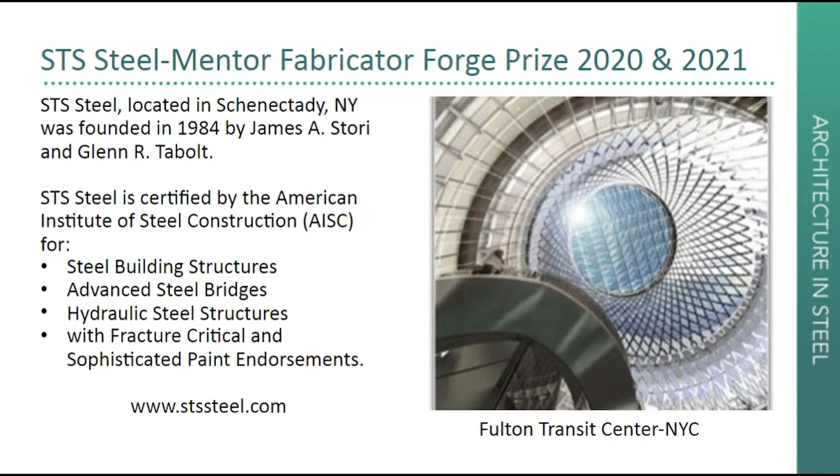When Alex Morales of AISC asked if I would be interested in mentoring for this prize, I didn't hesitate to say yes. The projects we've enjoyed most over the years have involved working with an architect and engineer in the design development phase to develop solutions to challenges created by the architect's innovative use of steel in a unique structure. I love the creative process, which I believe is fostered by collaboration, and I think the Forge Prize is a great way to foster both collaboration and creativity.

I don't want to take too much time away from Matt, Rosanna, and Hunter, so I've only a few slides showing some of the projects which we were involved with the design and which influenced our collaboration on the Forge Prize. In both Forge Prize presentations, you will see built-up shapes that presented fabrication challenges. With Matt and Rosanna, we discussed bending versus welding versus bolting on the main support structure. With Hunter, we discussed how we were going to field connect, field bolting or field welding the manufactured shapes.

In this 151st Street project shown here, we used field bolted end plates to line box sections which were shop fabricated and field welded. Even though the two Forge Prize bridges were very different, the built-up boxes influenced details on both pedestrian bridges. All of the designers involved in these prizes were eager to learn from our experience, and you will see that collaboration in their design.

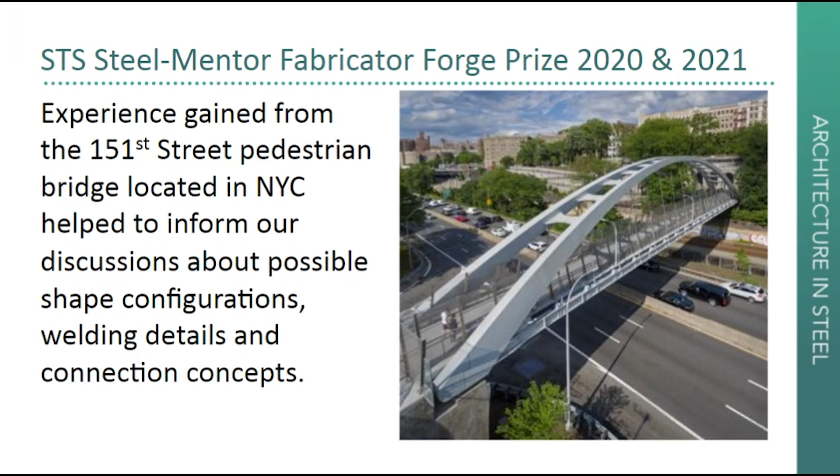One of the challenges of Matt and Rosanna's design was controlling the shape, particularly if we connected members with welded joints. We shared lessons learned on the Kennedy Center for the Performing Arts pedestrian bridge, which influenced the design to control weld distortion and maintain geometry. The connection method used on this project was also applicable to Hunter's design, which required field connection of different geometric shapes. It was interesting to collaborate on the details, even though it was a competition and not an actual project. We tried to solve problems as if they were going to be built.

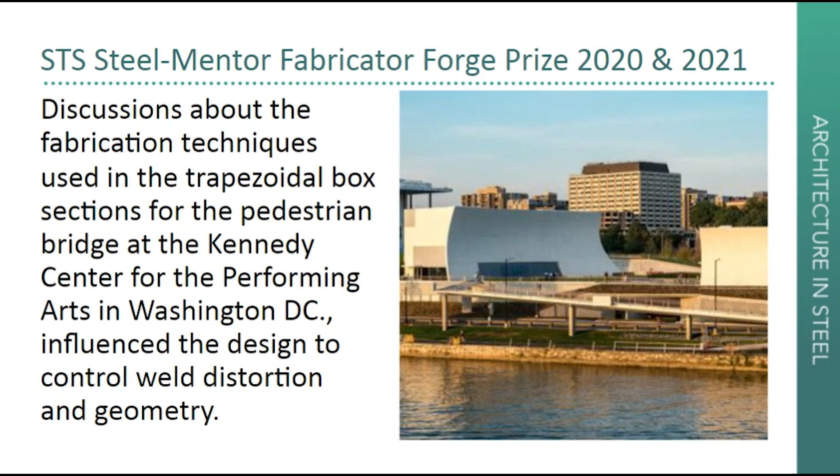The Kennedy Center for the Performing Arts project also illustrates what can be accomplished by early involvement of the fabricator, engineer, and architect. Working collaboratively, we assisted in the design and detailed development of this project, similar to the way the Forge Prize developed. The use of weathering steel on Matt and Rosanna's design presented some challenges for human contact. They knew that from the start, and you'll see that they created some interesting solutions.

This project, the T-House, is one of our most enjoyable and memorable projects. It was a collaboration with the architects Simon Ungers and Thomas Kinslow. I also believe this project is relevant to Hunter's in that it showed how the collaboration between an architect, engineer, and contractor working together from concept to completion can create a piece of art. A model of the T-House is part of the collection at the Museum of Modern Art in New York City. I think this teamwork which existed on these projects that I've shown embodies the spirit of collaboration championed by the Forge Prize.

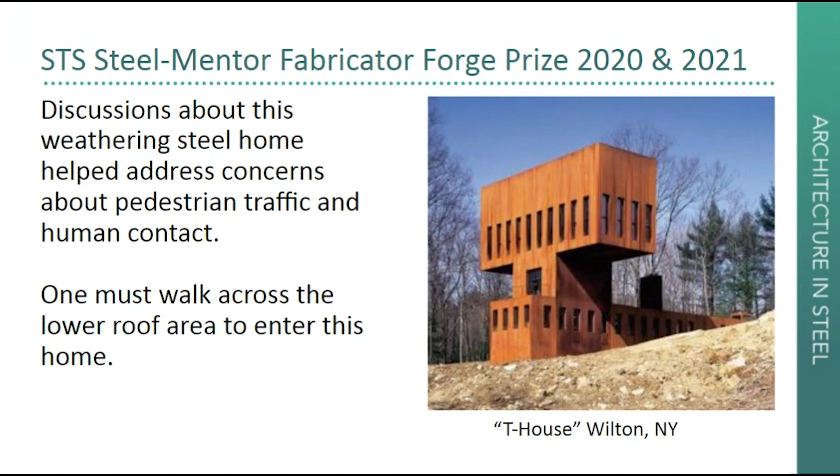We went through this journey about a year ago, so we're kind of regurgitating some memories here, so bear with us and hope you enjoy.

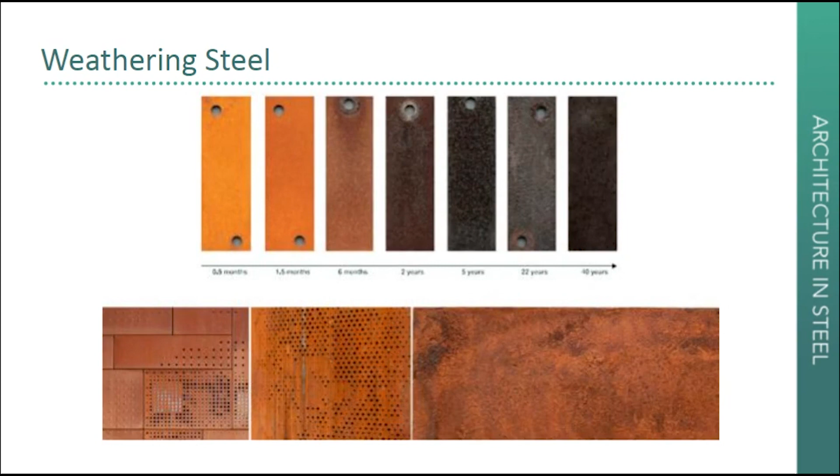So just to start us off, we ventured into this zone of weathering steel for multiple reasons, but also because of the lifespan and the sort of interest in the change over time, and just to introduce an element that would not be too closely resembling the Highline, but might have its own life and kind of mark where its life began by being able to sort of mark backwards from when the steel began its life on the

site. So we, of course, talked through some challenges with Glenn and had some prior experiences with other projects with weathering steel and its effects in both a positive, architecturally, aesthetically pleasing way, but also just the challenges that come along with the mixtures of alloys and such, and the finishing, drainage, and kind of erosion scenarios, which create the need for secondary finishing, which we're hoping to avoid.

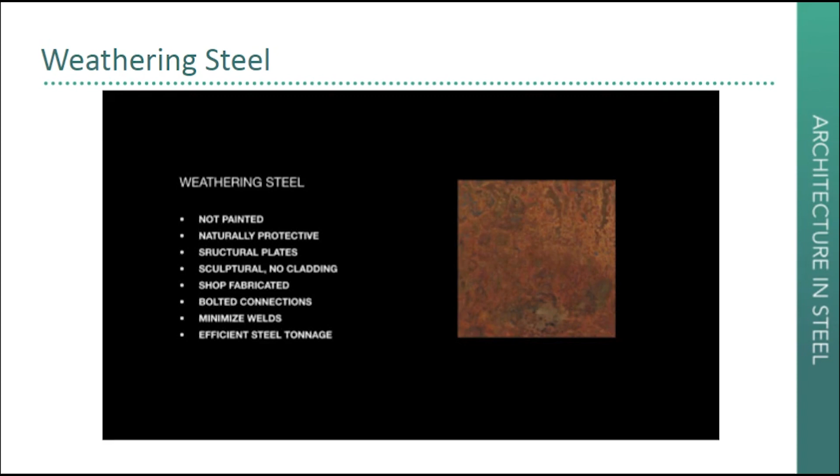So a lot of our project has to do with that approach of sort of creating opportunities to not encounter problems. So there's some projects in New York City, which Glenn showed upstate, which is a beautiful project and was an inspiration for us, as well as other cladding possibilities like the Barclays Center and various other projects within the city. So it served as a sort of path to using this material expression within the city.

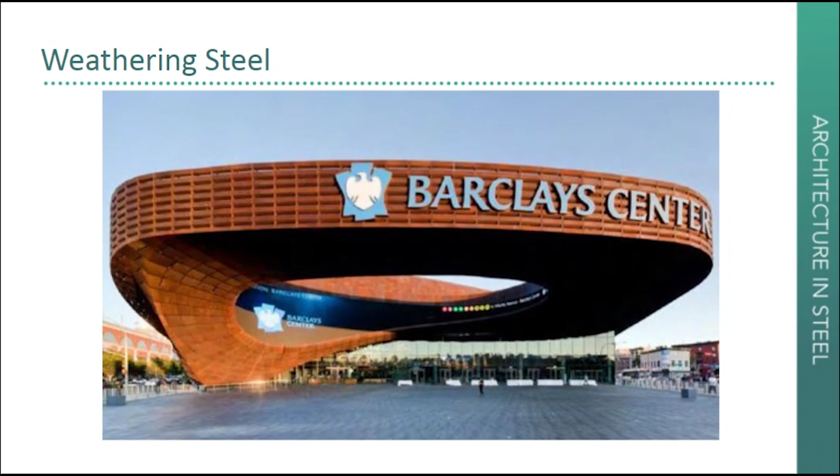It's not Corten, but we took some lessons and sort of found some beauty in the unpainted moments. And since this project is exposed to the outside, we took advantage of trying to pose that challenge to ourselves to keep it exposed. Right, and we were also very inspired by this idea that what you see is performing both structurally and is ultimately the aesthetic character of the structure, and that was a big part of our project.

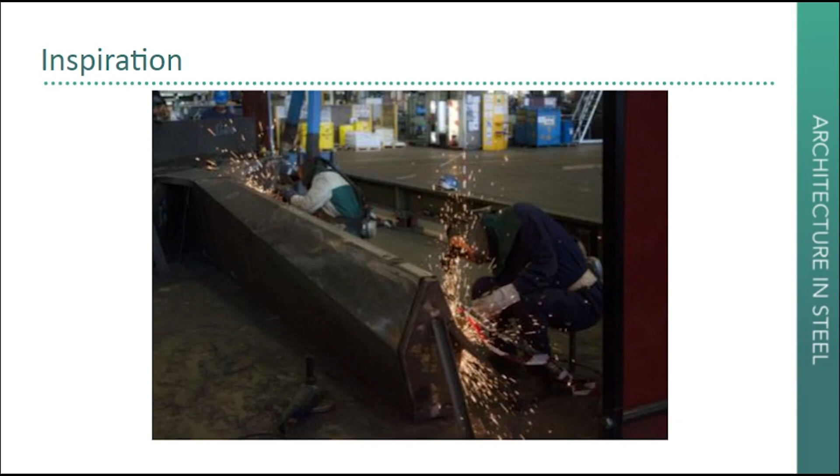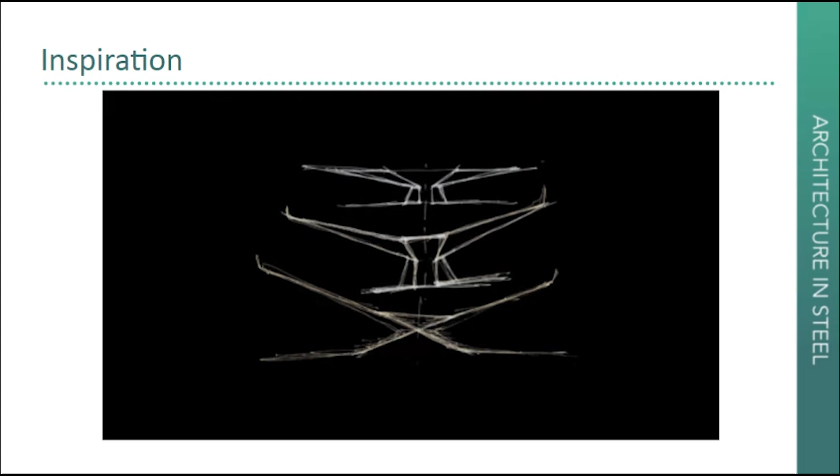So, we spent a good amount of time, this was a fabricator overseas, laboring over details and finding unique solutions for the Shed, and took some inspiration from other architects like Calatrava in terms of our structural balancing. We endeavored to create kind of large cantilevers that we're showing here, and you can see in the future project that we took some of these detailing moments and sketched them out with Glenn, sketched them out with our engineer, and came to some interesting solutions that also had to do a lot with using exposed steel,

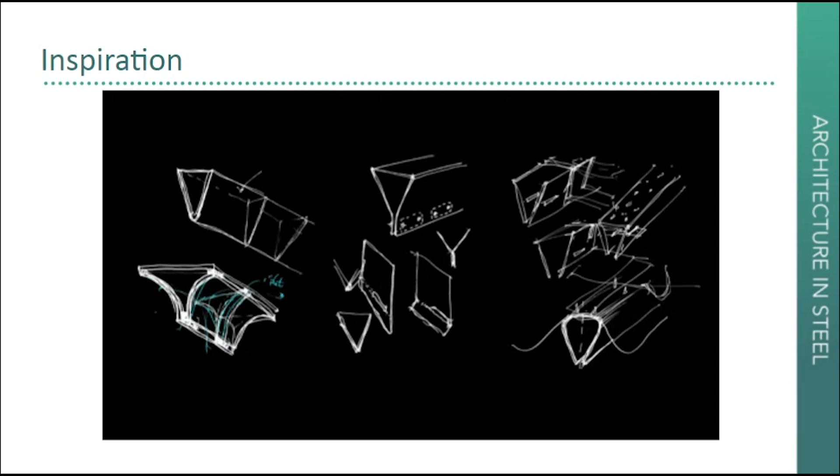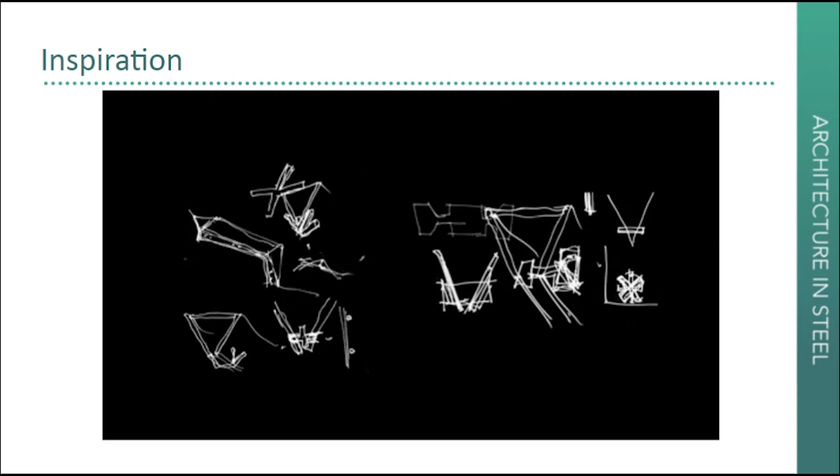untreated weathering steel. So a lot of these details you might not necessarily replicate through a stainless steel or painted process, but for us were pretty important to maintain just the overall expression, not creating closed voids, avoiding ponding, all those things that cause unique moments of erosion that make weathering steel not so ideal.

Yeah, so it was pretty critical to us that this elevated park create a public space underneath, and we really took a stance at 9th Avenue that this public space below starts to branch out through Ninth Avenue, reducing the number of traffic lanes, but creating a moment for commuters to pass through quickly, but then have a moment of pause underneath. And so we'll dive into more details on these planters, but it's really looking at using steel in two very different ways.

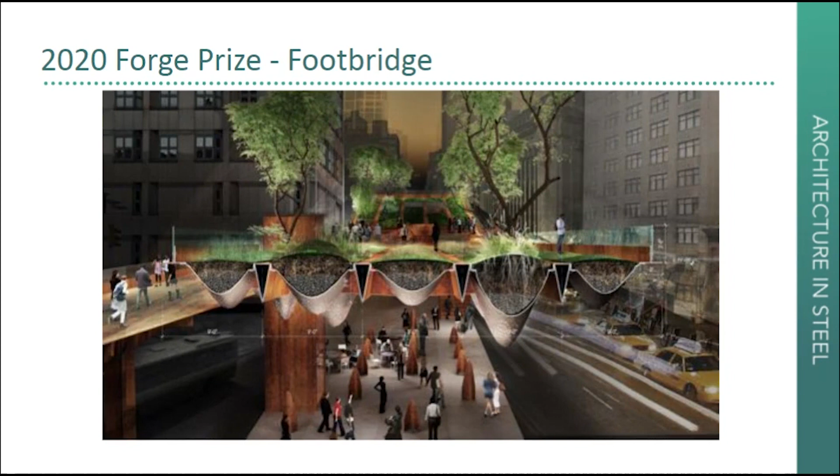The first, in the primary structure, utilizing the strength of steel in its long direction, but then also toying with the idea of hammered steel and creating a kind of catenary draping effect. And so those two things create almost opposite geometries, the sharpness versus the voluptuousness. And so I think this section was one of our initial sketches, and we really jumped off from there. And again, that center moment being both a very primary urban moment that draws people up and also the main touchdown point.

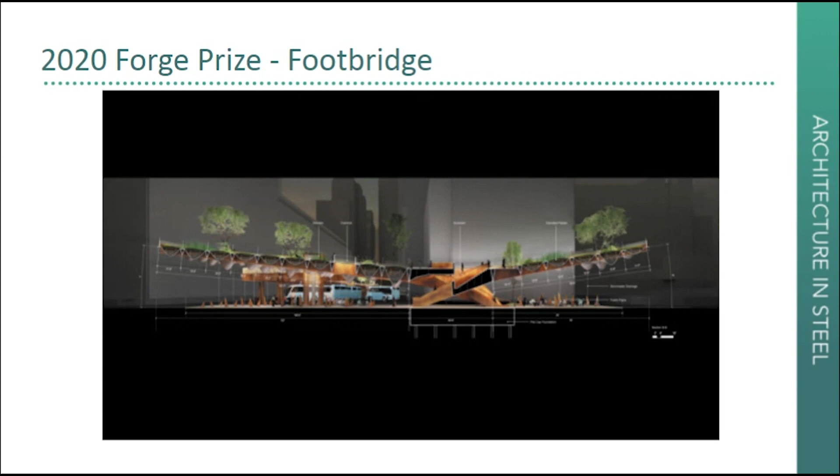And the whole goal, or the framework of this competition, the idea that it is about reducing construction and erection time, we wanted to make that evident in the physical form of the thing. So you're seeing these large cantilevers, which are dramatic from a public space point of view, but it's also really about that kit of parts that comes in and quickly gets attached. And the view.

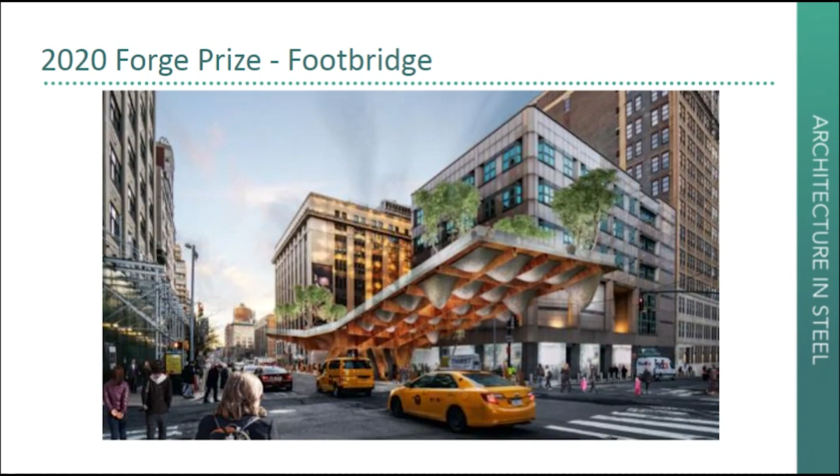So this is a view from 9th Avenue, as if you're leaving Moynihan Station, going towards the High Line. So those images were all from phase 1 of the competition, and then moving into phase 2, where we got involved with SDS Steel and further developments with Thornton Tomasetti.

Right. So part of the goal is to create a very minimal touchdown. So a maximum public space, as green as possible, but park-like and connecting to the High Line with some of the same motifs, but also a very minimal touchdown, as there's subways underneath here and there's various complexities to building in the city, of course.

So if we could centralize our foundation and we could centralize on the lower part the elevator and really have those be our primary touchdowns, what could we do to create the most elaborate system of public space up above? So we approached it as though there was a ladder system that was welded together, bolted together on site. So these would be pieces that would come truckable if we could get them over the bridges

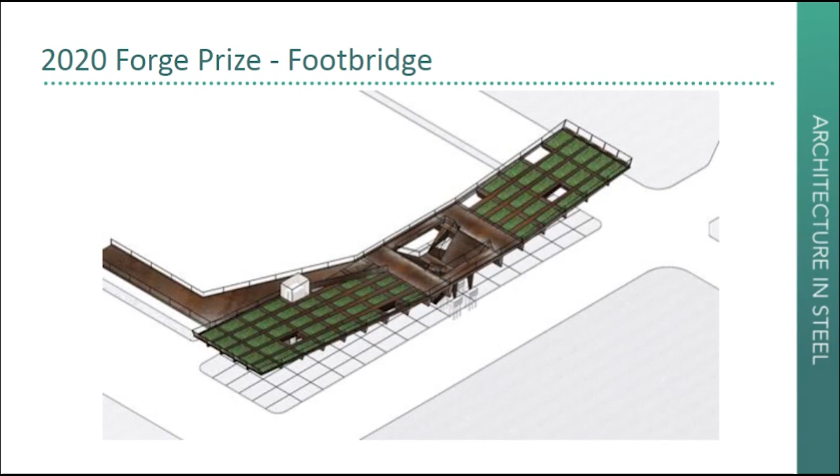And then after that phase was done, you could come drop in the planters and let the trees grow, get the guardrails in, and have a relatively quick erection time on this kind of complicated site.

So this video will play. If you click the next arrow. The next arrow. Okay.

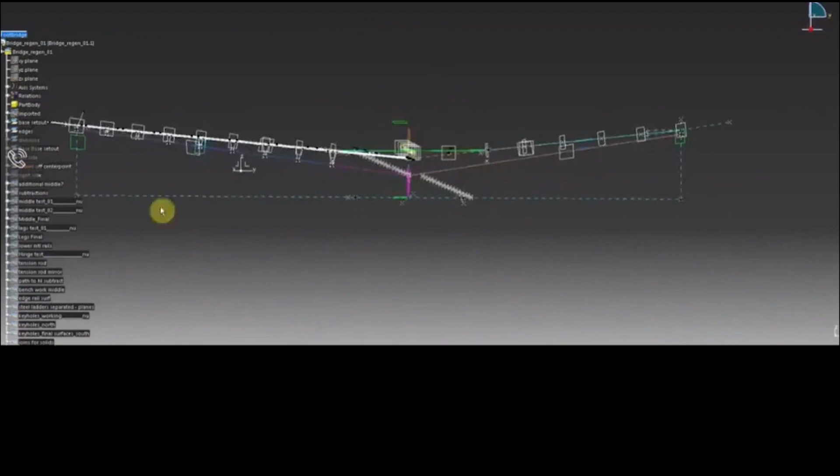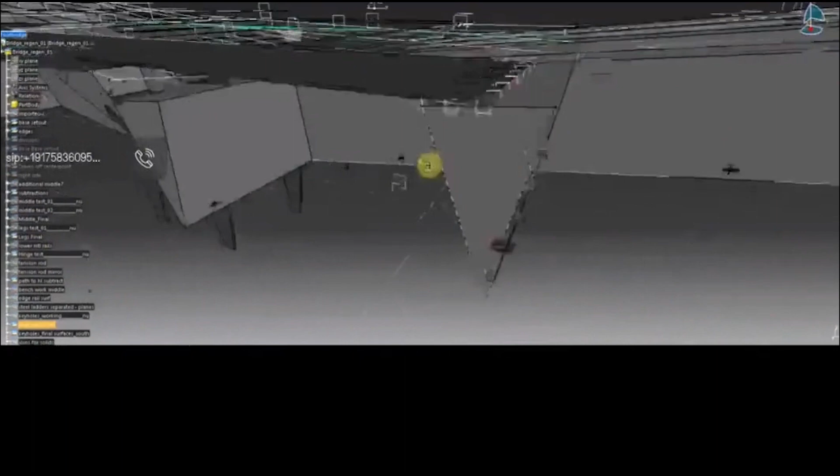So one of the tools that we like to use as a firm is Digital Project. We can get a lot of control out of the geometry this way. So we went through a process of controlling the geometry in a very precise way for the second round. We rebuilt our scheme that didn't have all the thicknesses and elements involved, and tried to pay attention to all these units.

Here's the pin system that would come together after the ladders are installed. It's a fun idea. Yeah, I'm not sure exactly the dimensions, of course, but we're always pushing for the most minimal. But there's a tension rod system underneath, and then as we develop this, it would be a relatively uniform section through steel that would start to array itself.

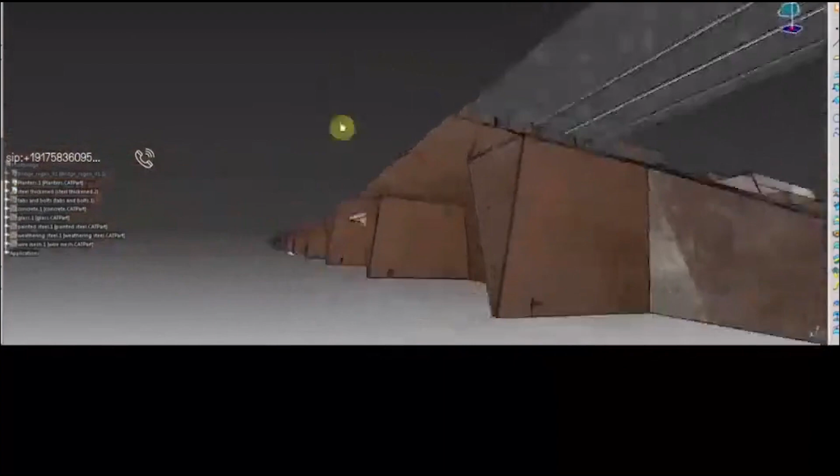Right. And a recurring theme on this project is this idea that the visual moment that you would think is doing most of the work here, the center of the piece that's cantilevering out of the ground, we try to drill down into how it's exactly performing and how the forces are flowing, and then try to create space in areas where it doesn't need to be bulky.

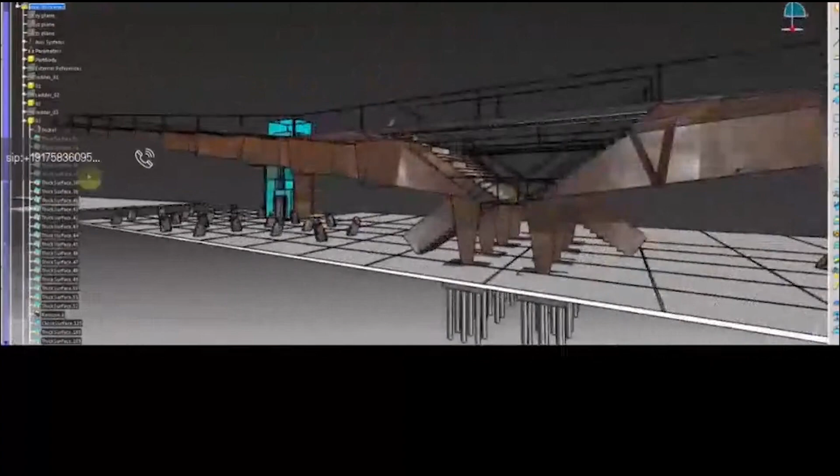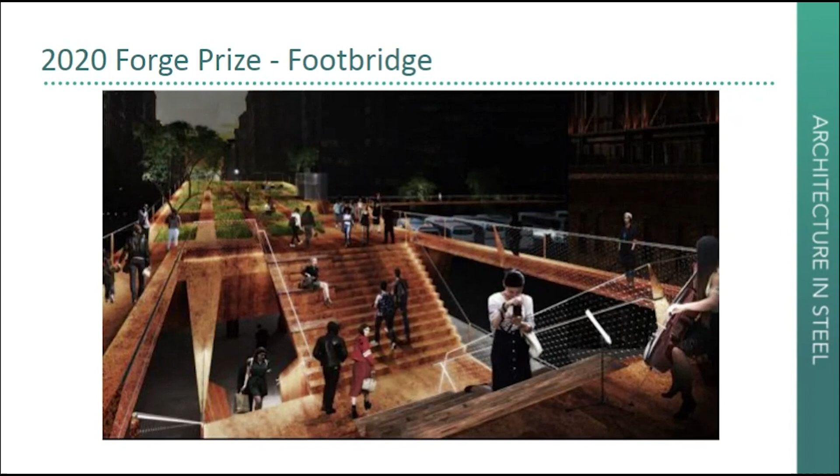So that occurs in the center portion here, where we've discovered that it's actually in tension. So we try to create these plates that are in tension and really just pinpoint exactly where those forces are flowing to maximize the way we're using steel and the way that it performs structurally. And that also goes into the beams themselves.

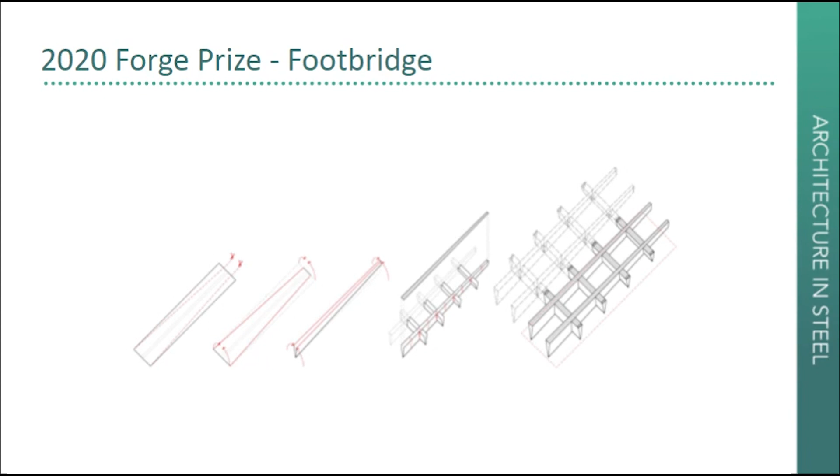In the first phase of the competition, we were playing with this idea of taking a structural plate steel and cutting it and bending it to create these V-shaped beams, and we were pretty excited about that as both an aesthetic but also as a performative piece.

And then as we got into the second phase and really drilled down what that means to fabricate but also how it's performing structurally, we started to see some of the challenges of the thickness of the plate required structurally, but then the need to bend that and some of the deformations that occur.

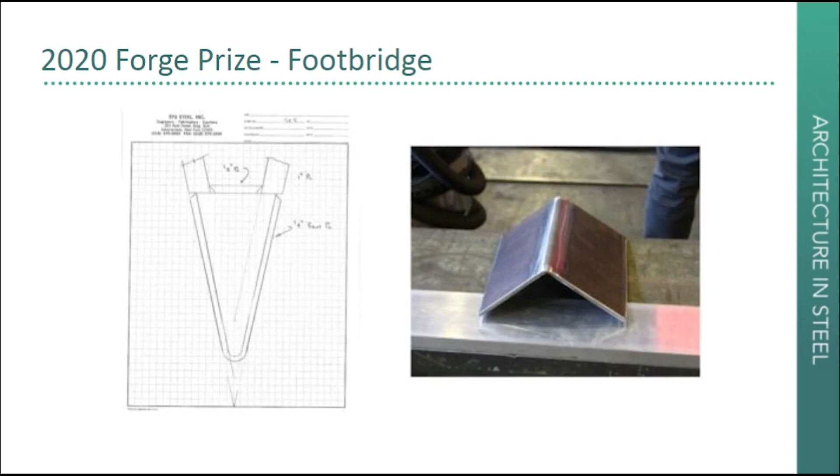So we challenged ourselves, rather than doing what is sketched, say, on the left in this slide, which essentially stops the structural steel at a certain point and then creates a kind of sacrificial aesthetic nosing cone, let's say. We tried to challenge ourselves and work with Glenn and others to try to go away from it being purely an aesthetic thing, but actually being true to what's happening.

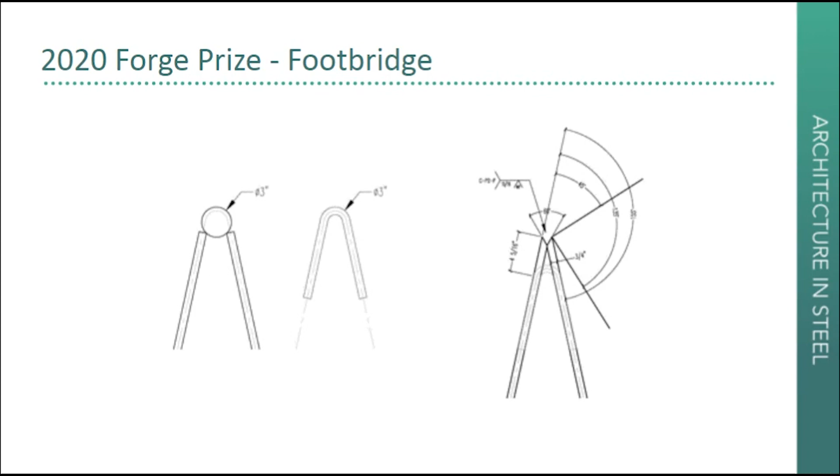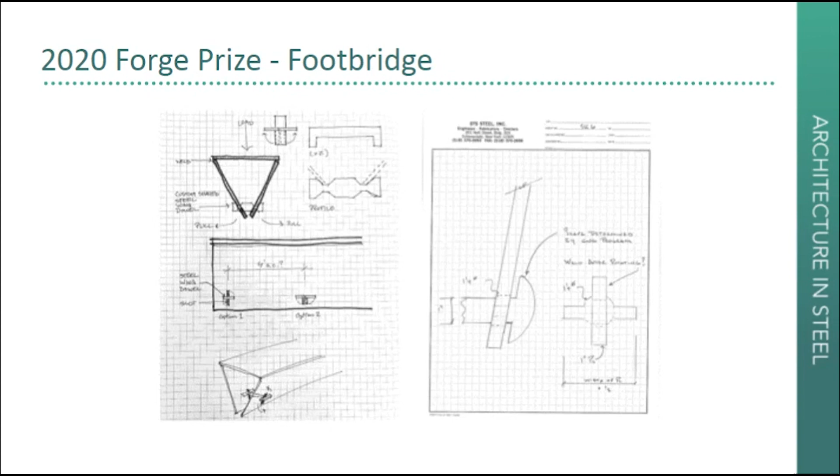And so again, the bottom of the beam that you would see, which is performing a specific way, we actually want to express the fact that there's a gap there instead of something like a rod or something that is continuous. And also just to allow the weathering steel to breathe. So, keeping the moisture unlocked and having an open section.

So the section on the right is where we kind of wound up in the final design, and we're sort of limiting the welding to the top plates, the shop weld locations, and then they're bolted together along the length. So again, those are those sort of fastener clips that we developed through this collaboration.

And then the notion that these long elements are bolted together with concealed openings for bolting connections. This is just sort of from lessons learned and creates stiffeners within the sections themselves. And access panels at the top, so we could maintain a very tight connection below, but sort of hide these access panels in the future.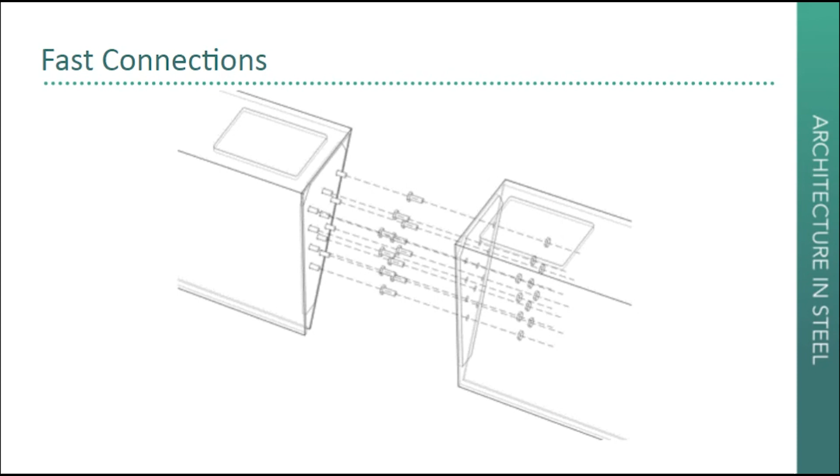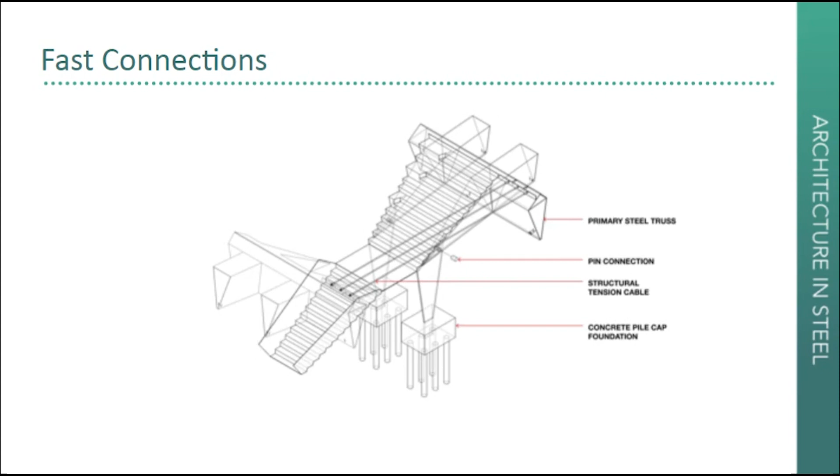So the stairs, also kind of a drawing showing the stair along with the tension cables from one side. They kind of mirror themselves as well, showing the foundations and the way it gets built up. So we talked a good amount with the engineer, with Glenn, just about where we want to put the bolts, where we want to put the splices, where you could truck it, where the weights become rational, where the cantilevers become relatively rational, and just creating a rhythm here.

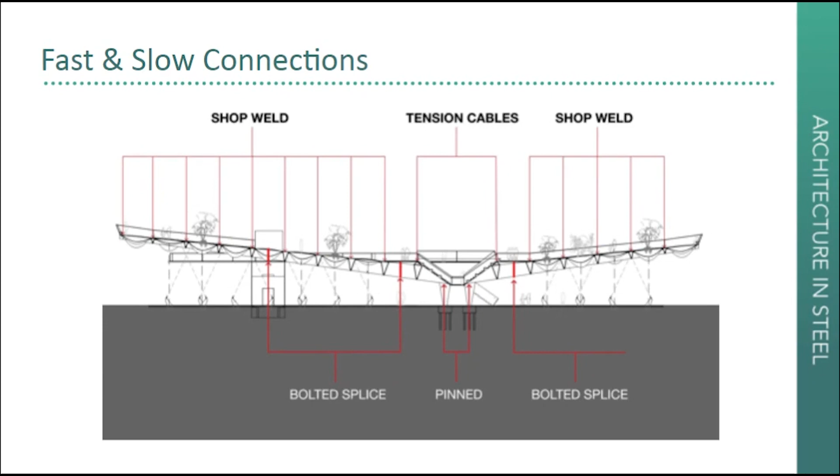So the puzzle kind of came together pretty nicely with the geometry, and then we started thinking about how we do these planters. So what could this planter be? What could the park feel result as? How much true soil and soil depth and drainage do we need? How do we get the drainage out of the bottom of these guys? How do you make the shape and let it be exposed out of stainless steel?

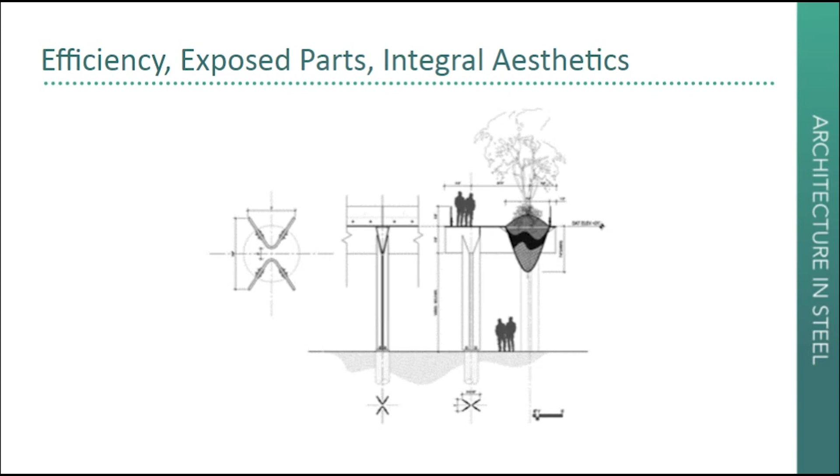And then there's also various connections which get you down the sort of faster part of the project down to the High Line, which is a very light touch of a couple of bent plates. So we were able to kind of bring back our bent plates in this area that ventured beyond the elevated park and bus shelter down to the spur of the High Line.

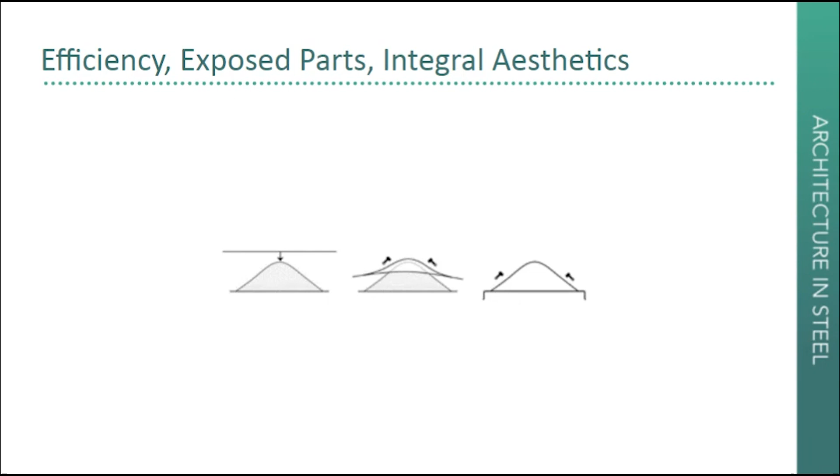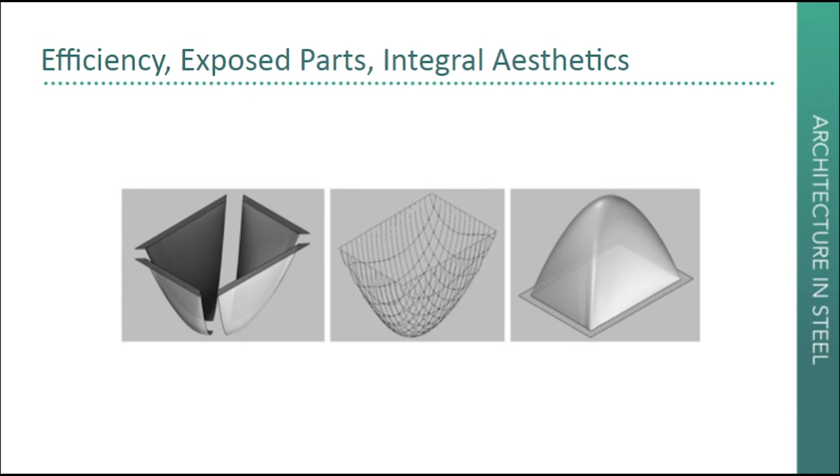So we wanted to contradict all this kind of nice material and maybe have some more human interaction that wasn't total machinery. Take a piece of steel and just hammer it onto a form to create our planters. So this actually could be done in multiple ways, and we had various conversations with Glenn about, is this really the best way, to maybe piece it together in four parts and weld it up. Maybe there's some wire mesh, maybe there's a way to cast or do something more unique.

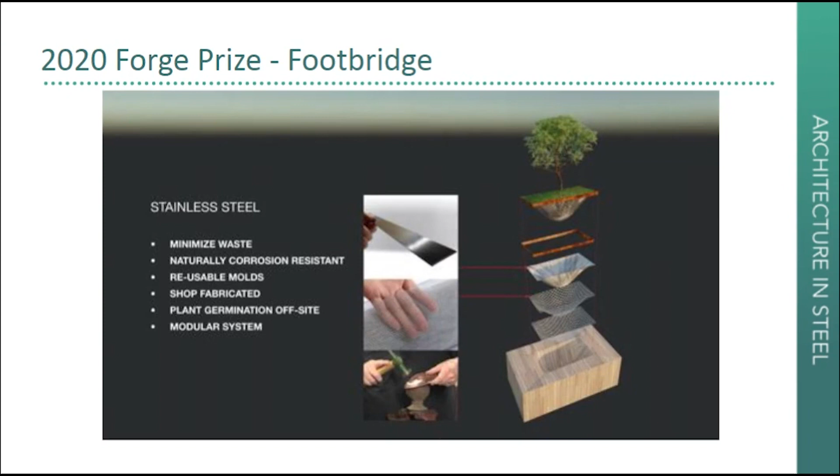And so we went through a series of conversations and found that maybe if we did a mold and used a couple cross wire meshes and then took a relatively thin expression of steel and stainless steel, and we just mashed all these together in a frame, could you do that and allow the drainage through and still get the expression we wanted? So we were able to figure that out.

And then, consistently we're asking ourselves this question, as we did through other projects that were done in steel, big and small. And for us, for the duration of the competition, it was a beautiful thing to have Glenn for the second phase. We could have used him in the first phase. So I think that there's no best time. As soon as you have a good idea, I think it's great to bring some people to the table.

And of course, then there's the erection scenario, which I think SCS also had some expertise in, but also went through this process of building large components in the city and thought about it as a puzzle of parts.

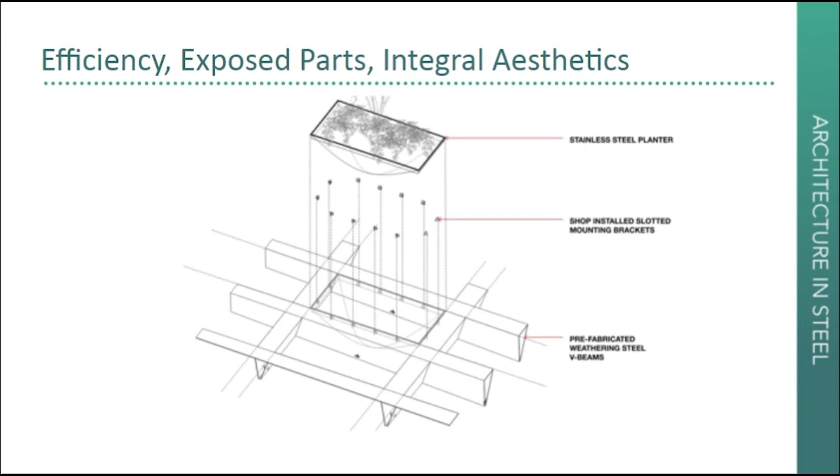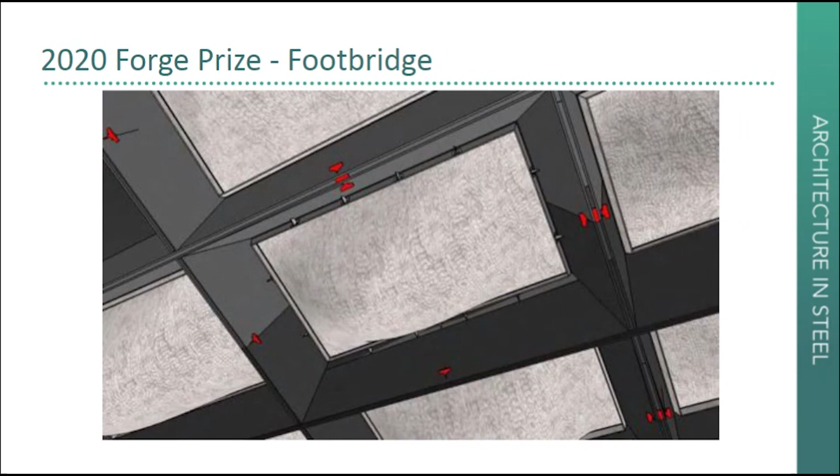We even got so far as to designing these clips and access to them and replacement of the planters. And right, that was kind of the idea: that these large components are shipped into the site and not only are their connections prefabricated, but even the sub-elements that you would think would come in and be secondary or another trade, that logic is also baked into those sections, all the way down to the minutia of pieces that are going to attach onto that element. So it's all thoroughly coordinated and thought through even before it arrives to the site.

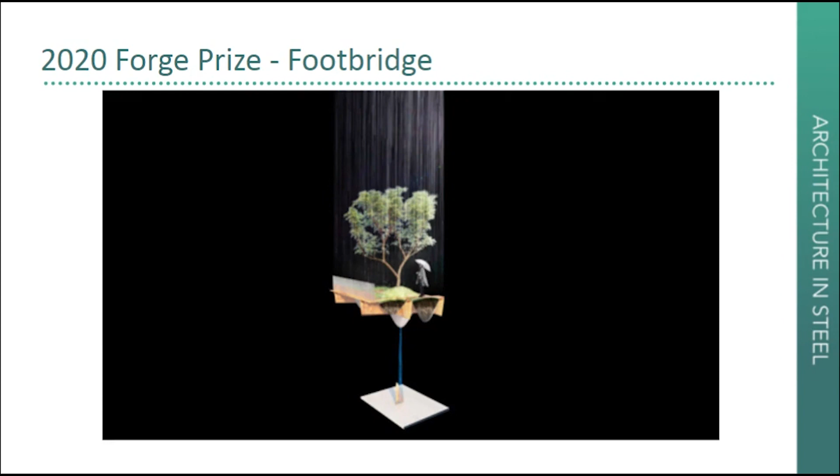So we got enough time, through the second phase, to think about how drainage would happen, how we would get this water not just pumped right back into the sewer, but filtered through the site, and what would happen at the ground plane without having a whole system of irrigation tubes. So we're allowing the water collected within each planter to filter down through a drainage drip scenario, because with weathering steel there is a slight concern about the runoff having enough of a rust color, which we might love, spreading its way down Ninth Avenue.

But we took the challenge on to do something maybe a little more unique and created a light source and planter for uplighting, and also a little bench to sit and take a phone call. So we got into some of these little details. Right, and it took the project beyond the sculptural elevated thing down into really feeling like a piece of Manhattan, starting to create its own urban infrastructure where it is both a lighting element and a seating element, but something iconic that ties the elevated element down to the ground plane where people actually interact and have a more tactile experience with the bridge.

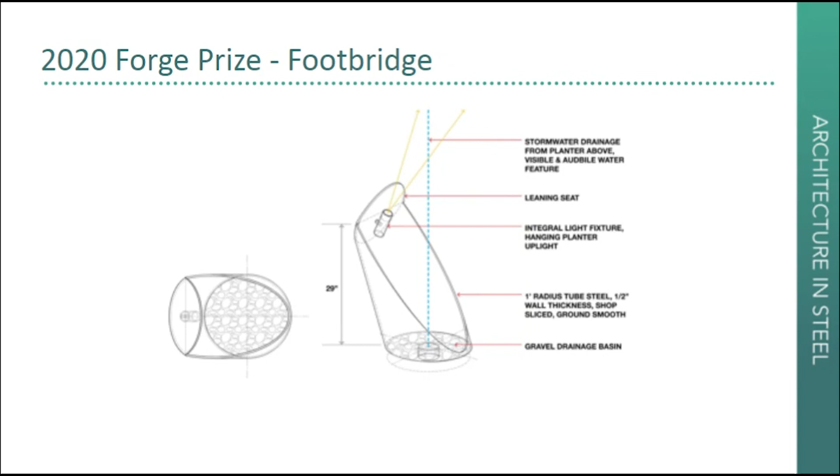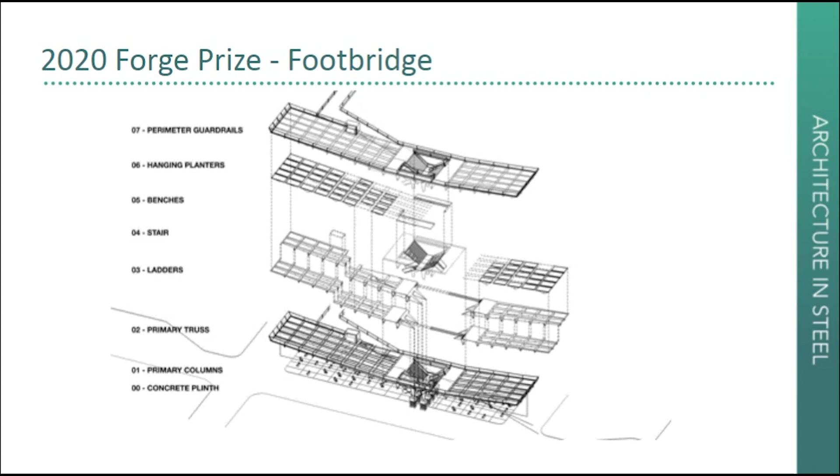Yeah, so we basically saw this puzzle coming together with this scenario. It's a relatively complicated drawing Rosanna did here, but it pulled all of these pieces together in a clearly delineated way, which focused, of course, with the competition on steel, but also on constructability and the rhythm of execution that was inherent to both the High Line in its origin and the references to the city, the city grid and the urban environment of this part of Manhattan.

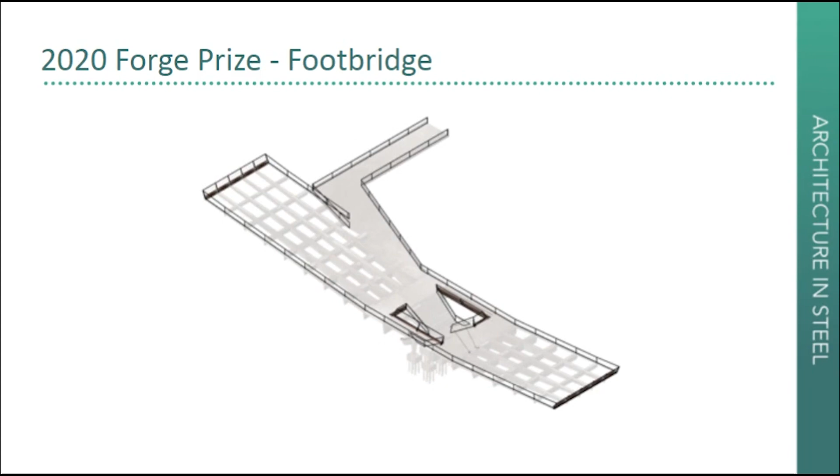Of course, this doesn't have a title; it's just the railings. And then we got into all the railings and the benches that might surround, using an expanded mesh. Right. We started out with a glass rail in the initial phase, and then quickly realized we wanted that railing to dematerialize and not be so reflective, and to be more in the same vein as the weathering portion. So we shifted to a mesh condition, but always working with the V-beams as the geometric logic, and tracking those angles all the way through.

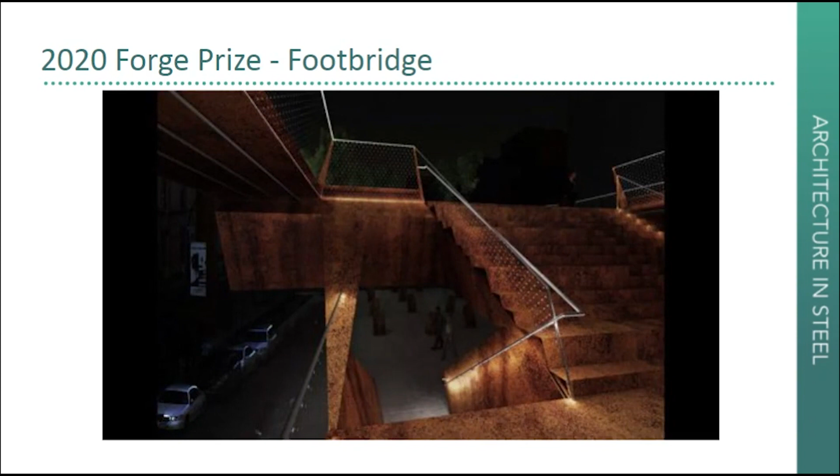And the beauty of the rust at night, the way it might add a nice softness to the otherwise cool environment, and then the lighting scheme as you got up above, really creating an environment for pausing within the city, having a little bit of shelter. And this image was really exciting for us to visualize and finally see the project come to life, because this was really what we were after: the same material, the steel, presented in two very distinct ways, structurally and visually. So this is where it tied together all of those aspects, and is, we would assume, a very fast thing to construct, and that was really the goal here.

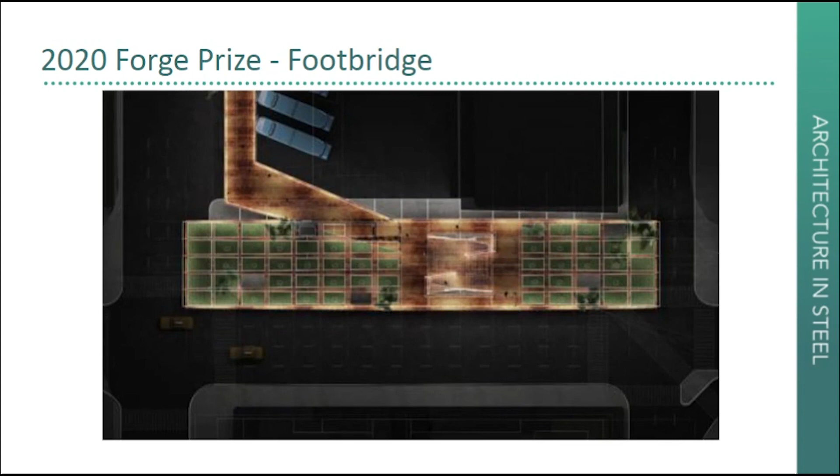But I think like any more infrastructural-based project, this kind of thinking is really about what it is next to in context. So for instance, if you're seeing the plan on the screen, the bridge is right next to an adjacent building that has a ground floor essentially creating a covered awning over that space. So we didn't integrate programs, but as a systematic approach, you could imagine other buildings spilling out underneath and around this space.

Yeah, New York has adaptability, and so part of our interest in the High Line and working around the High Line, as we have in our other professional lives, is that there's all these unique opportunities that get filled in, right? There's now art galleries, performance spaces underneath the High Line, all these other buildings that are engaging with it.

So as New York lives on and breathes on, we would certainly envision this bridge as part of the life of the city that would get adapted and added onto or subtracted from, or you could imagine taking away some of these planters and poking through some skylights as we did here and there, or create sandboxes or different areas. So it was a bit of a prototype type of project, but for round two we focused predominantly on the steel because that was the nature of the competition, not necessarily on program. But we'd love to build it and focus on program, of course.

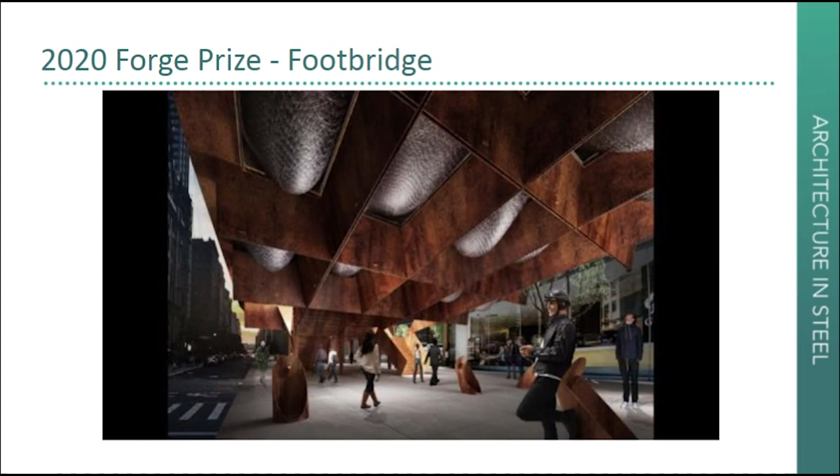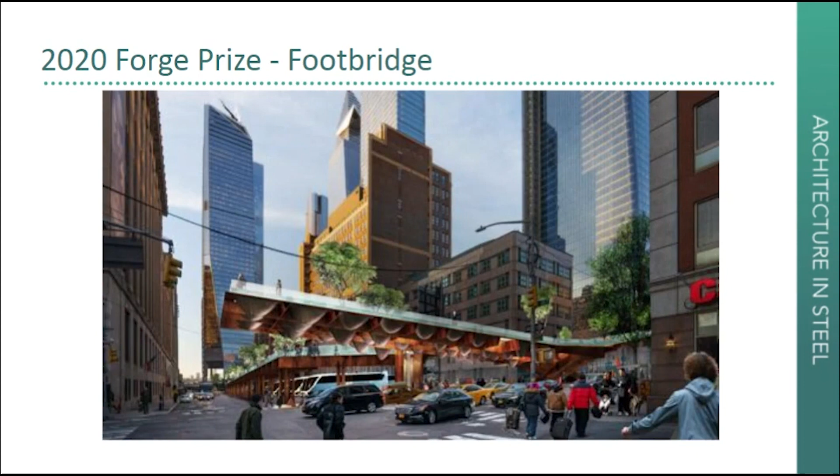Awesome. And then I have one final question. Is the presented model an FE analysis? We did get very minor, just centerline structural analysis from TT. With Glenn, we were mostly talking about details because, within the range that we're operating, there's a relative confidence based on just basic sizing from our structural engineer from TT. But generally, that was our extent of analysis.

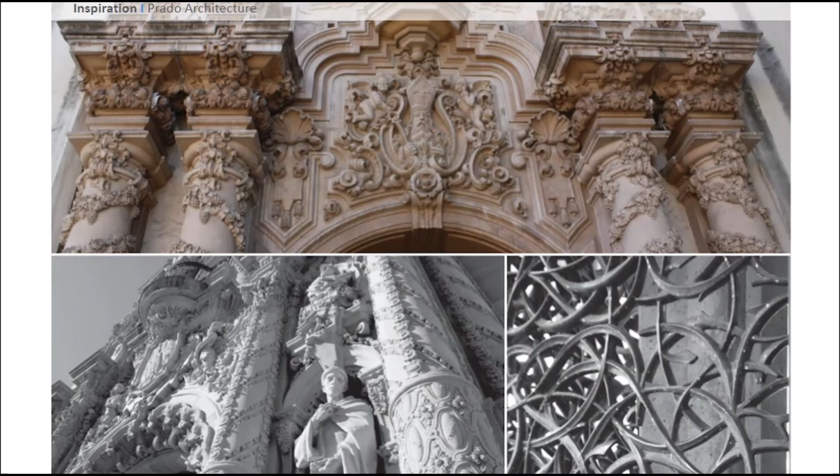And so there are other sources of inspiration, most notably some of the Prado architecture, specifically this highly decorative ornament that you see in the Spanish colonial structures within the Prado. It's really amazing how the light and shadow are flickering off of these surfaces, and something that I really focused on trying to bring in abstractly and modernize for this structure.

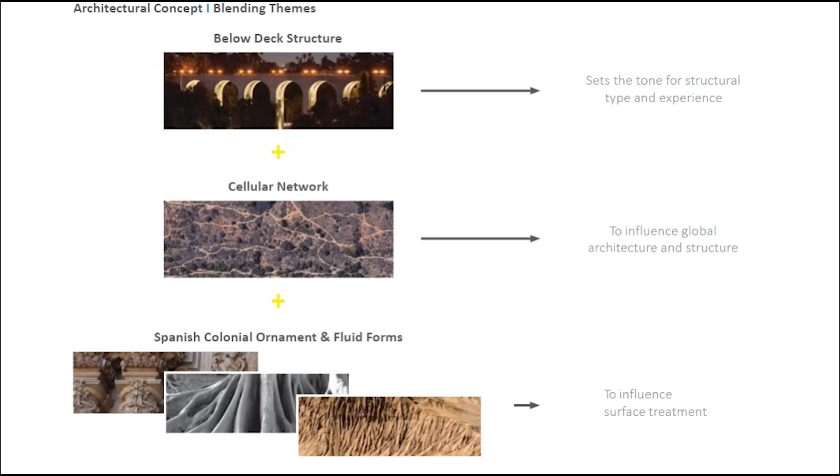And the bridge really lays out as four expanding and contracting moments where they really function as overlooks, but they are expanding to accommodate these portals in the structure, which allow you to view through the bridge to the canyon ecosystem below. But these apertures also feature something unique, which is hammocks. So the idea of being able to suspend yourself above those portals, just have a wonderful leisure moment while you're looking below and being able to appreciate the spatial articulation of the structure while you're on the deck.

There's also vegetation integrated in between these portals, the idea that we want the structure to function as an extension of the Prado, but also an extension of the park itself, so that while you're on it, you're getting wonderful views to the ocean, downtown, the canyon ecosystem, and its vegetation.

The structure is divided into three 250-foot spans with a 2% slope from east to west. As you can see there, it passes over Zoo Place in the lower left there, and then Florida Drive to the right of the eastern column. There's also many trails, as you can see from the plan view, passing under. They give you really wonderful moments to look up at the structure.

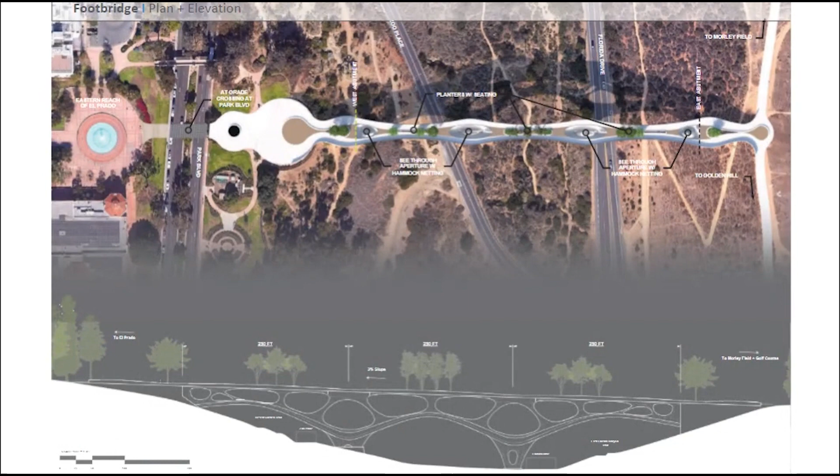So this is a view from Florida Drive looking north. You can note the vegetation over strategic moments where there are spandrels below, and so those are all integrated as planters. And so this is our first view where we get to see that surface articulation close up and personal. So this would be, if you're driving on Florida Drive, just passing by the eastern column. And what I would point out is the way and manner in which these spherical components have a path that's traced along them.

What's happening is I'm using a flow analysis tool, which mimics the process of water or particles in this situation, and tracing them down to their lowest path. It really is as if you poured digital water into the volume and then traced its path on the way down. So I think it is reminiscent of that Spanish architecture, not literally, but more abstractly. And the effect is such that it looks like these components are either growing up and emerging from the canyon landscape or even dripping down into it.

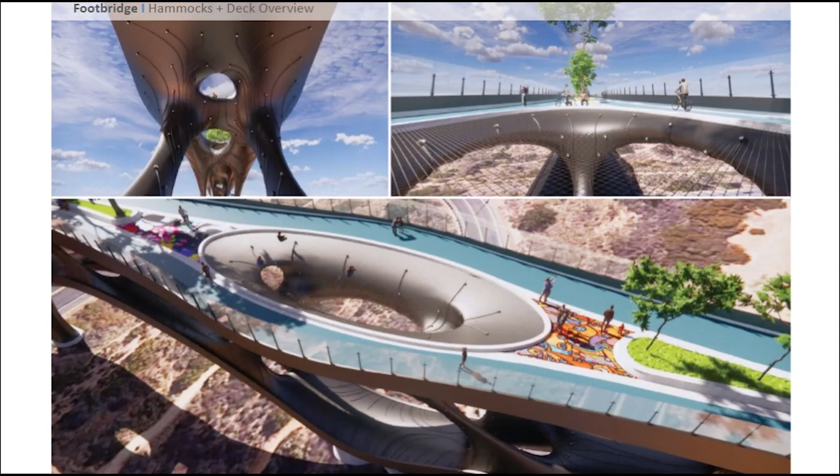So here's a few more views of the deck experience. The upper left is as if you were below the soffit looking toward that hammock and portal, in which case there are many involutions to connect the ground plane with the structure itself. A view as if you're hanging out on that hammock, being able to see below to the canyon. And then here's a view from above which focuses in on how those two paths, which are 10 feet, split around the portal.

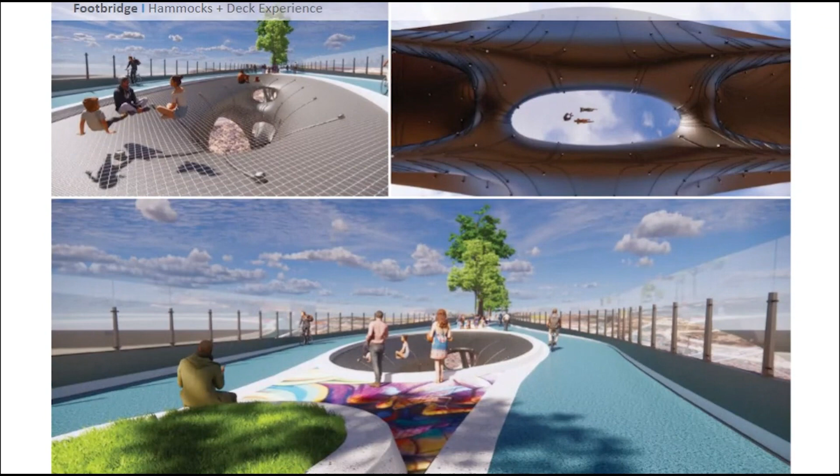And then in between the portal and the planters, there's areas for public art, something where monthly or even annually an artist can come in and leave their mark and identity on the structure. Another view from below, looking up through the hammock, and on the upper left here, a view on the hammock, just to get an idea of what that experience would be like. And then if you were sitting at the planter looking toward the Prado to the west.

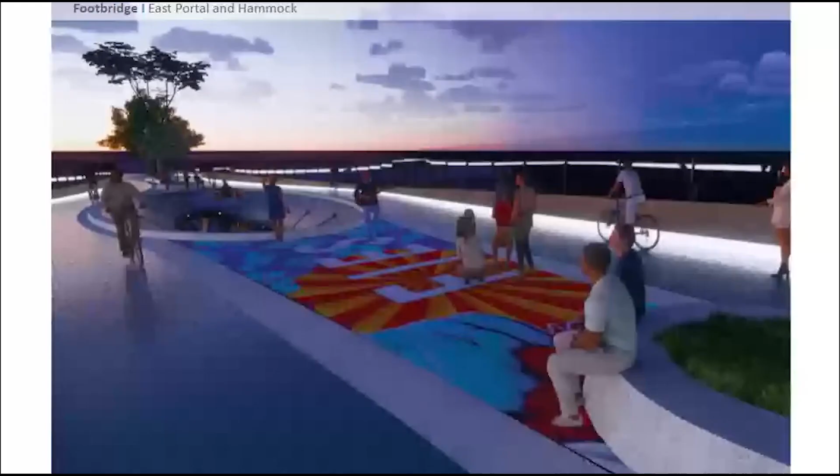And so much like Matt and Rosanna, there was kind of a two-part process in this version of the Forge Prize. The first, my feedback was really to focus on lighting and how that would contribute to the structure, specifically on the deck, but also architecturally. And so you can see here, the lighting system of the deck is kind of tucked into the lower reaches of the barrier so that it looks like a sweeping ribbon of light that connects east and west.

And you can begin to see some of those surface articulations, the spherical ones specifically at the ends of the path, glow. And the point is that these are actually luminaires. And the idea is that at night, when you're walking in the trail or biking, which is quite common to Florida Canyon, you can look up and see beyond on like a starry night, these kind of resemble a constellation of sorts where the silhouette really starts to fade away. And that lighting system looks quite chaotic, much like the constellations.

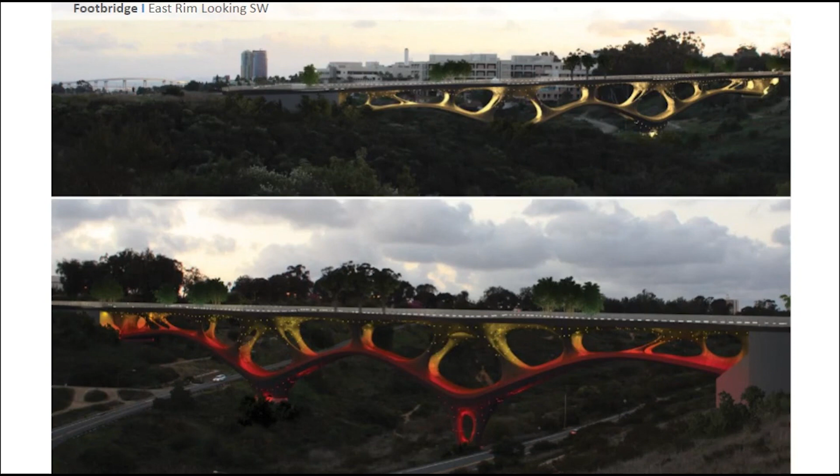So here's a view on the east rim. The upper image is looking southwest. You can see the Coronado Bay Bridge beyond the Naval Hospital. And then below, the east rim looking northwest. And one of the many possible variations of lighting design for this, where there's essentially isolating the lower lights as red, sweeping from the column along the arch member, and then the above section being a yellow light. Obviously, there are many possibilities of programmable LEDs these days.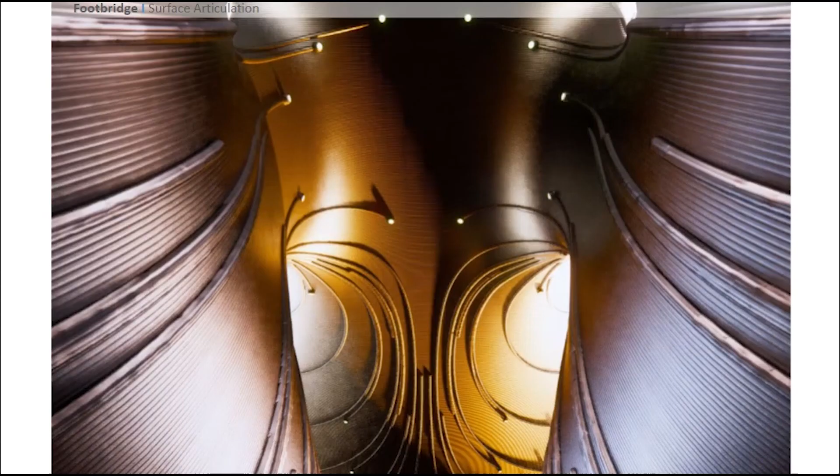And I think this image really captures that kind of surface articulation and reaches back to that kind of Spanish ornate with the large sweeping paths, and then how those spherical articulations terminate in this moment that you can see between the involution of the arch member up to the soffit below. So here's an animation.

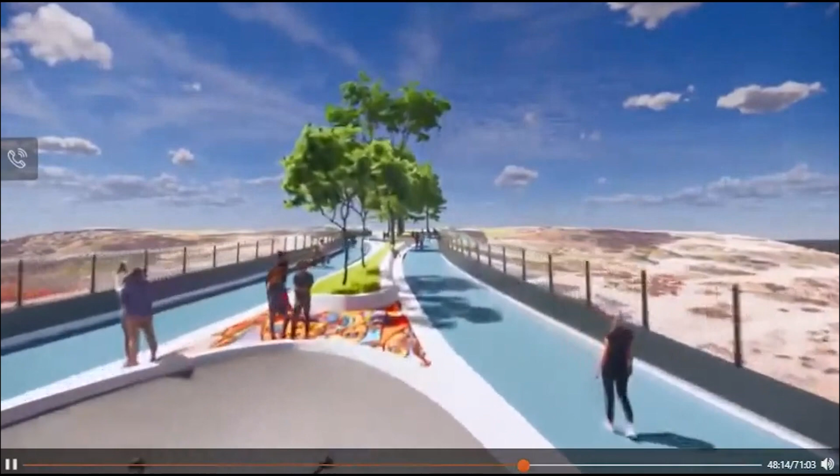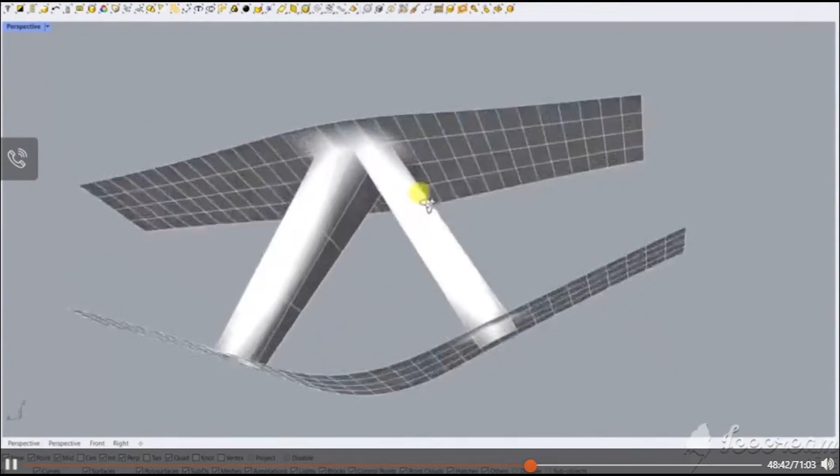And so the next two videos focus in on how this structure was modeled. Just a quick preview. Essentially, I'm using a mesh relaxation technique, which is you plug in fairly rectilinear, normal geometry, and then this mesh relaxation essentially induces tension into the system as if you were digitally pulling fabric. It's really a form finding process, which leads to that overall smooth articulation.

And then the second video focuses on how that path of the surface articulation was traced. So you can think of it as even distribution of points across its surface, and then the software is recording those points on a set interval, which allows you to trace those as vertices to its lowest point.

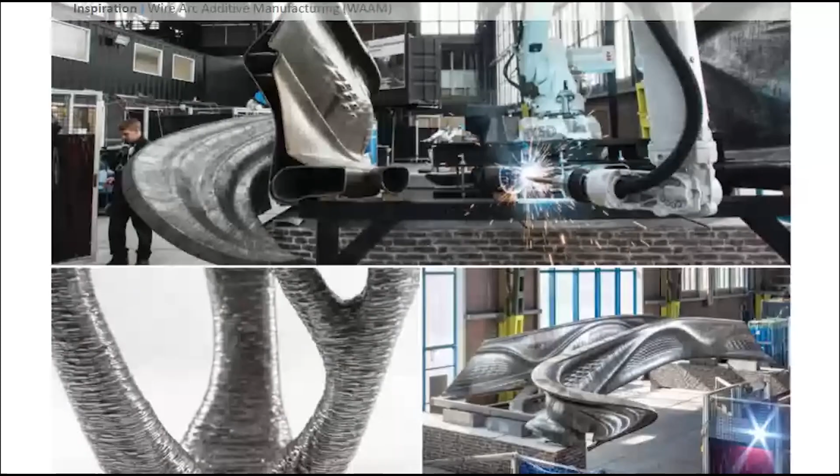And so, as you can imagine, having to take a structure like that through final design is nothing short of a nightmare. Everything is spline geometry and it's very complicated. Having to draw that out and define those as radial arcs, as profiles and alignments is really a tedious task. And of course, we all know steel does not necessarily want to be doubly curved. That is unless you're 3D printing it.

And so what we're seeing on the slide right now is the fabrication of MX3D's canal bridge in Amsterdam, and the process of using wire arc additive manufacturing, which the abbreviation is WAAM. Essentially, you're sticking a welding rod to the end of a robot arm and tracing sections, and you're basically getting that section at fractions of an inch at a time and building that part up. And so this particular project is about 9 to 10 meters spanning over the canal, and it's all printed from structural stainless steel. And it obviously has really high potential with fluid forms and creating those out of steel.

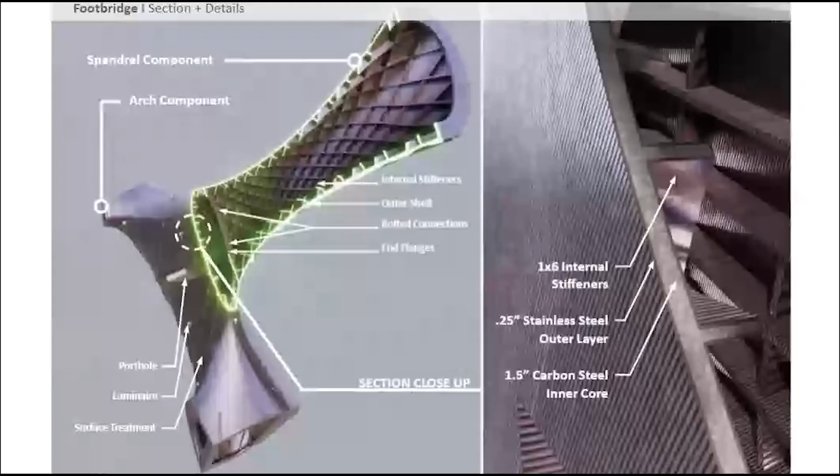And so the bridge is not printed all in place all at once. The concept here is to print individual components and then piece them together. And so the components of this bridge are really of a similar size and scale as that Amsterdam bridge. And so what we're seeing here on the screen is a spandrel component being connected to an arch component. And there's a three-dimensional section taken through it, highlighted in green. And so we're able to see the internal stiffening process, which is designed as a series of diagonal crisscrossing stiffeners.

There are many ways to do this, and the idea was we wanted to highlight that 3D printing stainless, or just steel in general, really opens up a world of possibilities from a formal standpoint, but also challenges engineers to think about what would be the right system, and not having to stick to planar elements and diaphragms and stiffeners on the inside. And so there's internal stiffeners.

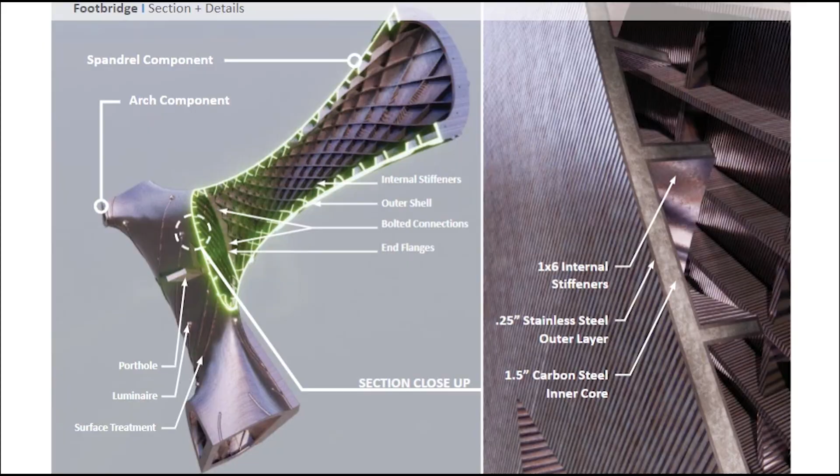And so these components are fabricated in the Arizona landfill. Since it's not a great area at the moment, the thought was that there would be a temporary facility built on that site. The advantage of that is that you can print larger components, because you're not reliant upon printing at a factory, getting it on a road, and being confined to, say, the truck bed size. So really your limiting factor is what the crane can effectively lift into place.

From there we're installing temporary stay towers to support the arch components as they're cantilevering out. As one component gets brought on, it's attached to a cable to support it until we get to the moment where we put the quote unquote keystone component in. At the fourth arch segment, that first keystone goes in. And then we get to the fifth arch segment, and then finally the outer keystones.

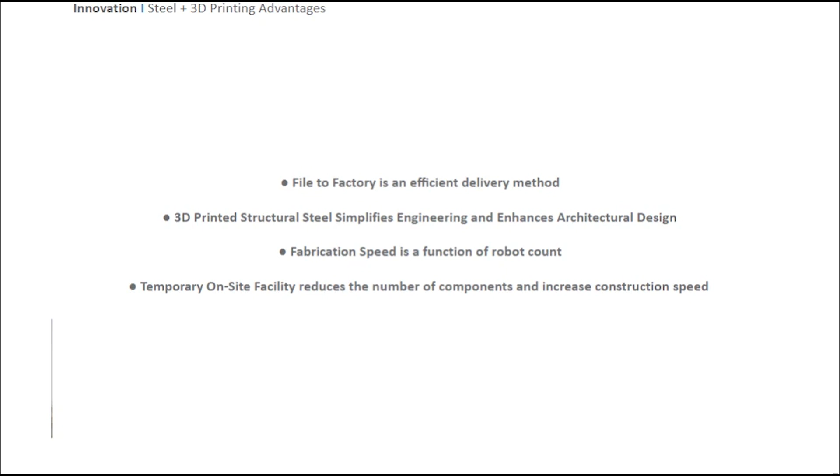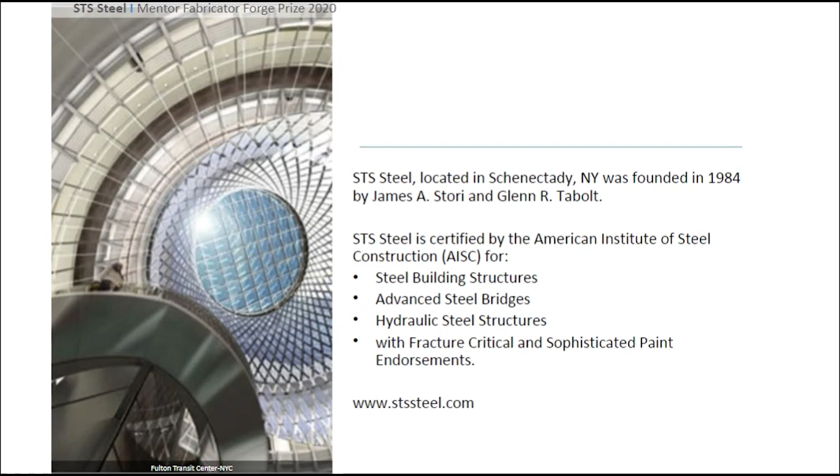Okay, well, thank you. That was great. Thanks to both. I'm not planning to go through these as we already went through them before, but just want to say that I was very impressed with all the people who competed on this prize, and it was a pleasure working with Matt, Rosanna, and with Hunter. I enjoyed getting to know all of them and how their experiences inspired their design.

Particularly with Hunter, this year I was not that familiar with 3D printing, particularly at this scale, but the more I worked with him and understood the technology, the more enthusiastic I became about it. And I think one thing that this Forge Prize shows is that architects' creativity drives engineers and fabricators to find innovative solutions, and it pushes our industry forward. And congratulations to all the winners, and really appreciate the involvement with this prize. Thank you.

And so with that, I'd like to open it up to Q&A. Thank you. We do indeed have some questions from the audience, but before we do that, I would like to do a couple of the interactive polling questions. So everyone should be seeing the first poll question. And that question is, true or false, emerging professionals in the design industry have no role in leading practice trends and objectives. So please participate by clicking the answer you believe is correct. I'll give it a few minutes. Okay, so 83.3% believe that this statement is false. Hunter, Rosanna, or Matthew, do you want to speak really quickly to this question?

This is Matt here. I'm super interested in Hunter's process and the way that we can push things forward. Even though our particular project might feel dissimilar in some ways, I feel like there's a push going on with both of these projects to engage moments that are somewhat overlooked from an architectural point of view. So I feel like the poll results are great. I think some of us younger people may see things differently. So it's a beautiful thing to have a forum.